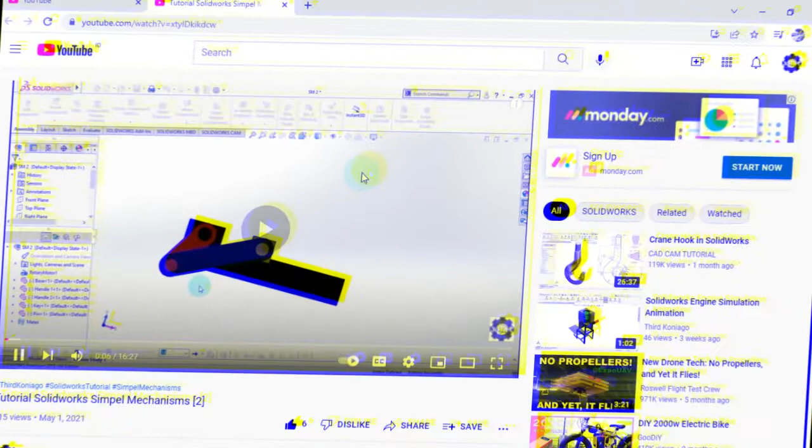Hello everyone, welcome back to my channel, and today I want to show you how to make simple mechanisms like this in Fusion 360. Without wasting time, let's start it.

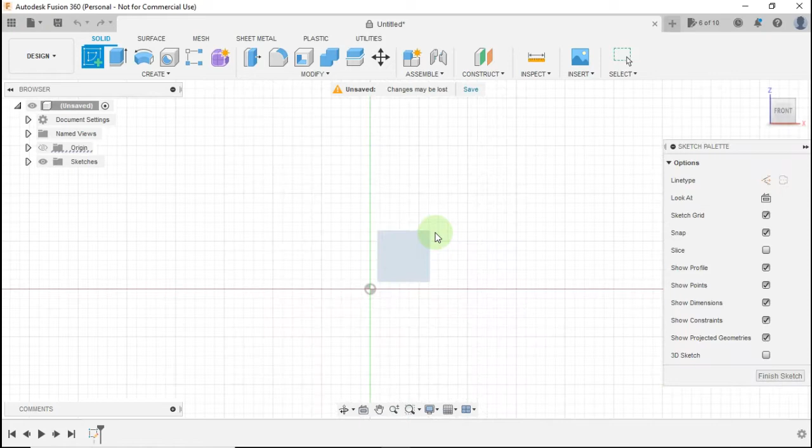First step, we make a mechanism base. Click sketch, click this plane, activate line, click this point, up the line and make line length 10 mm. Point right the line, make line length 8 mm. Point down the line, make line length 5 mm.

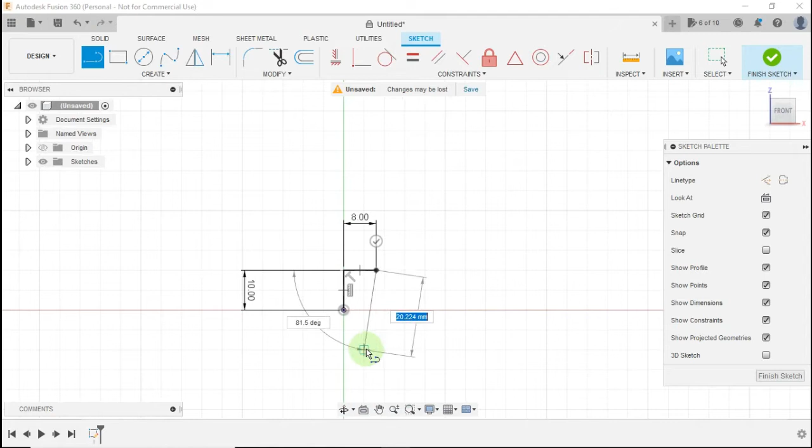Point right the line, point down the line, make line length 5 mm, and click this point. Activate sketch dimension, click this line and this line, make distance 36.5 mm.

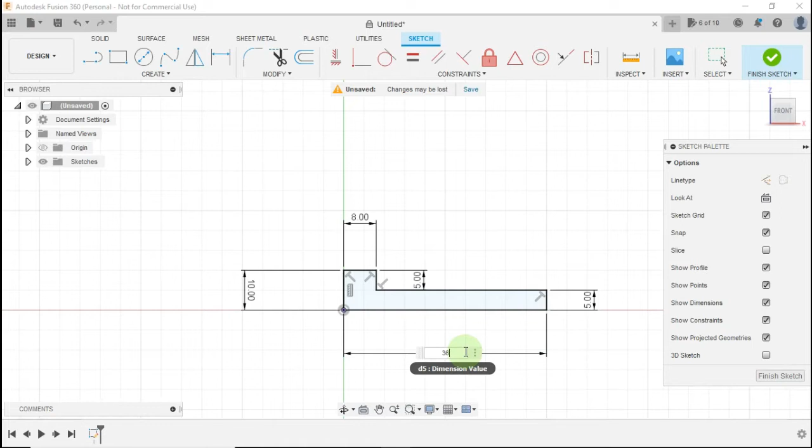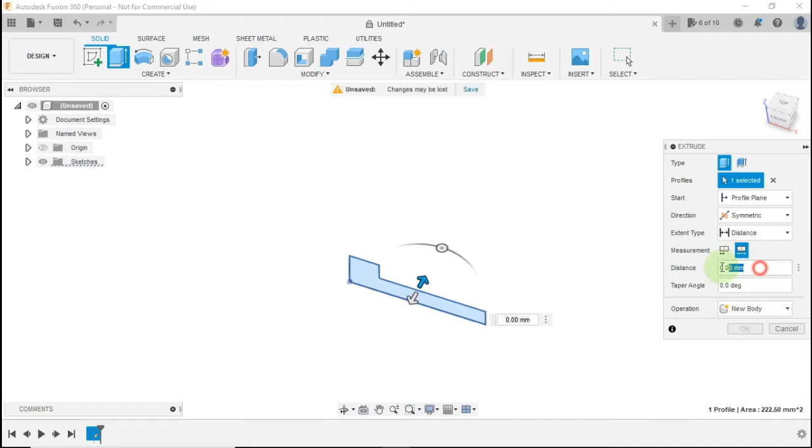Activate extrude, click this sketch, make direction symmetric, click whole length, make distance 5 mm. And make operation new component. Okay.

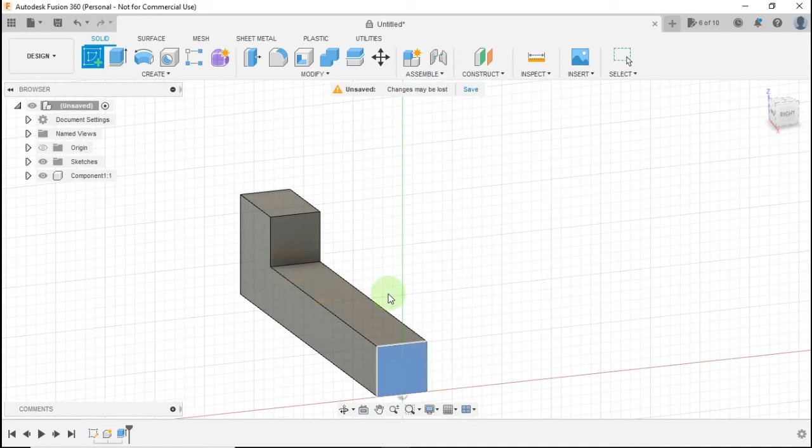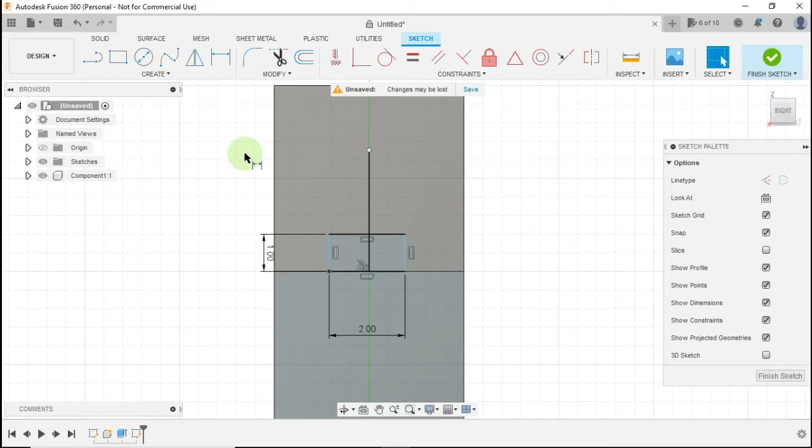Click create sketch, click this face, activate line, click from this point to this point, activate rectangle, click this point, make width 2 mm and height 1 mm. Activate sketch dimension, click this line, make distance 1 mm.

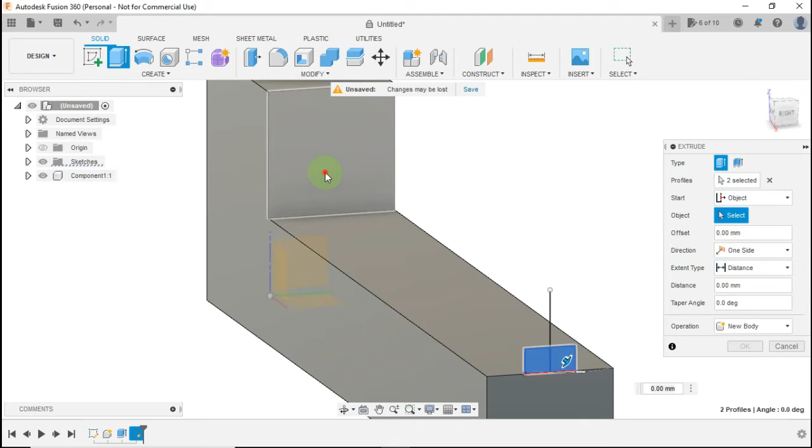Activate extrude, click this sketch, oops, sorry, not this. Make extent type to object, click this face, okay.

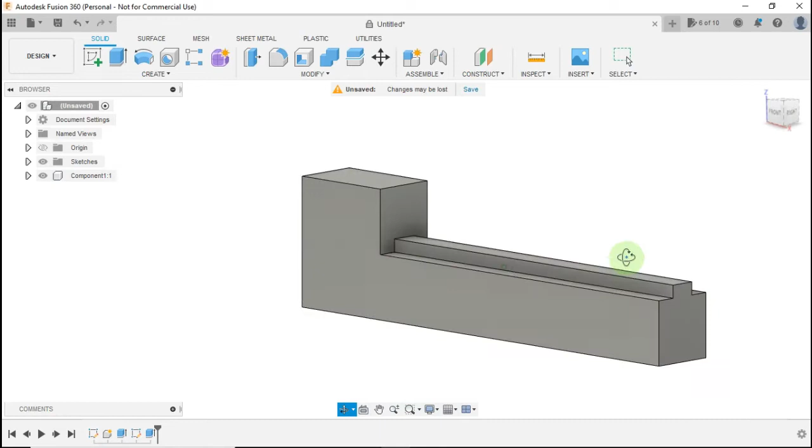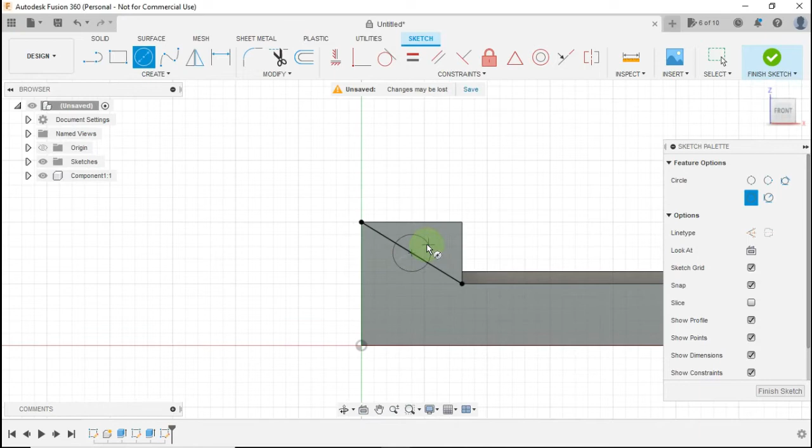Now we make a stem on this side. Click create sketch, click this face and activate line, click this point to this point, activate circle, click this point, make circle diameter 3 mm. Activate extrude, click circle, make distance 3 mm.

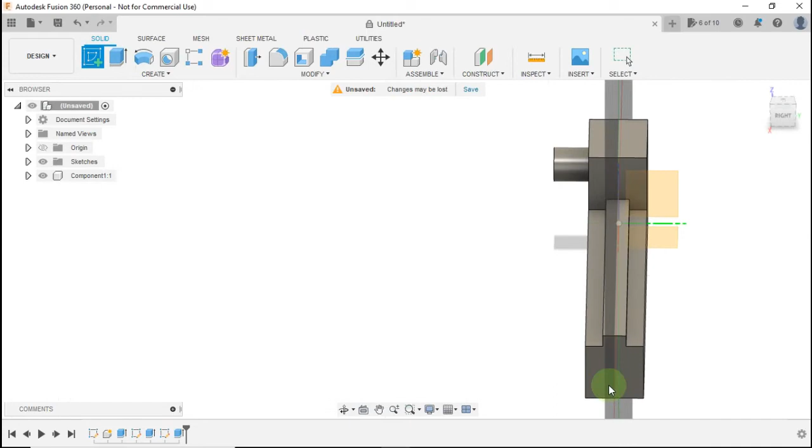Base is ready. Now we make a new component. Click create sketch, click this face, activate line, click this point to this point, just follow the base surface.

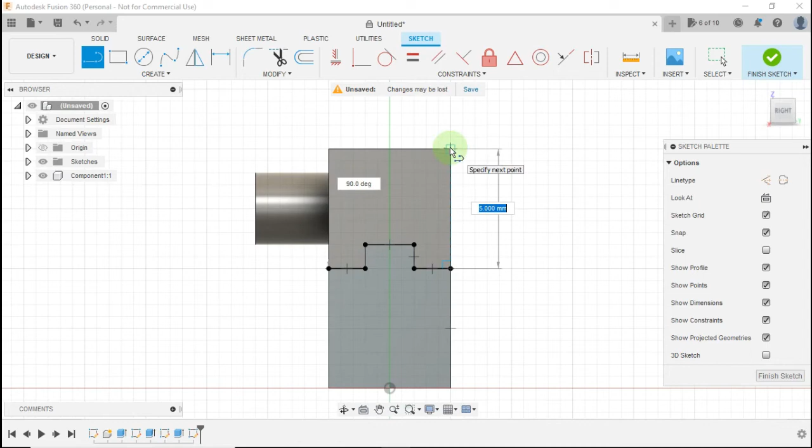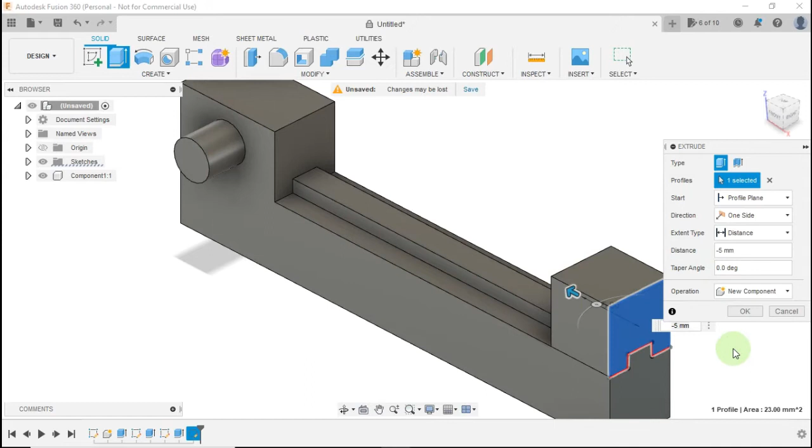Activate extrude, click this sketch, make distance minus 5 mm. And make operation new component. Okay, see, we make a new component. You can drag this component. If you want to return to the initial position, click revert position.

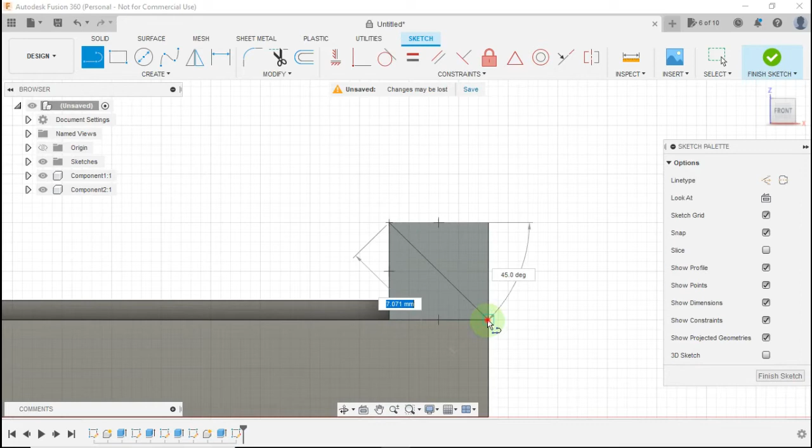Click this face, click create sketch, activate line, click this point to this point, activate circle, click this point, make circle diameter 3 mm. Activate extrude, click this circle, make distance 6 mm. Okay.

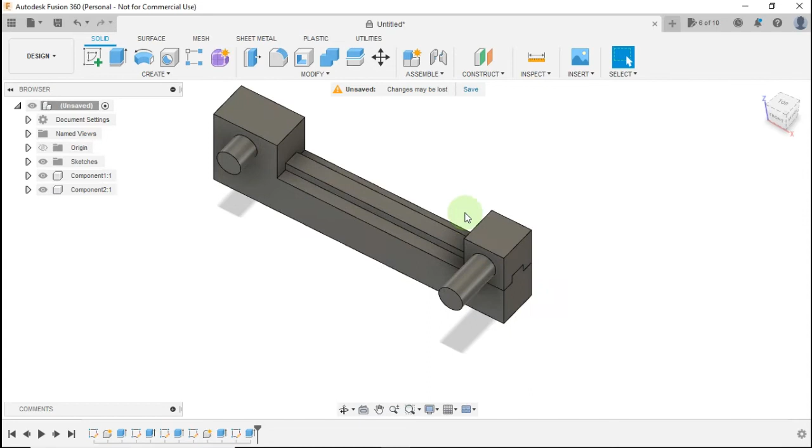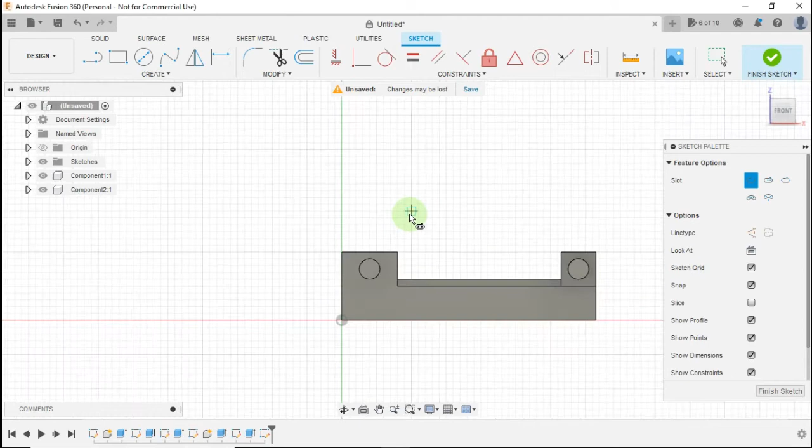Now we make the connecting rod. Click create sketch. Click this plane. Activate slot. Click this point to this point. Activate sketch dimension. Make this line length 10 mm. Make slot radius 2.5 mm.

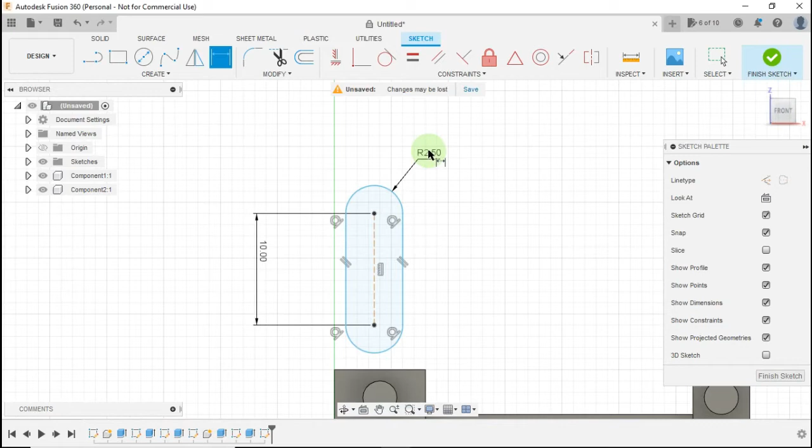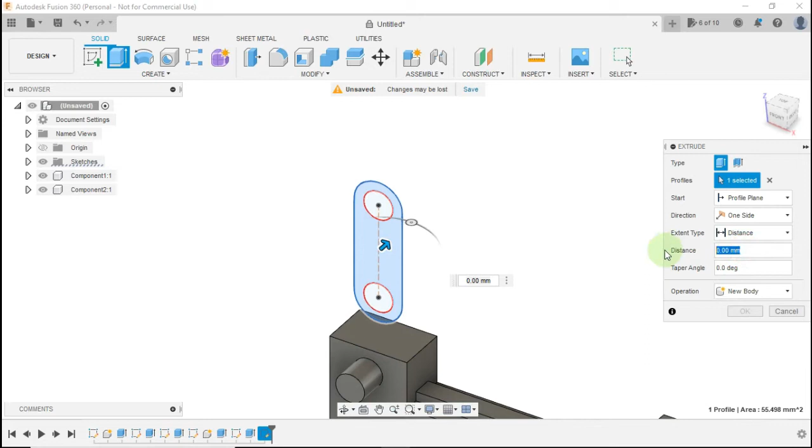Activate circle. Click this point. Make circle diameter 3 mm. And make the same circle on the other side. Activate extrude. Click this sketch. Make distance 3 mm. And make operation new component. Okay.

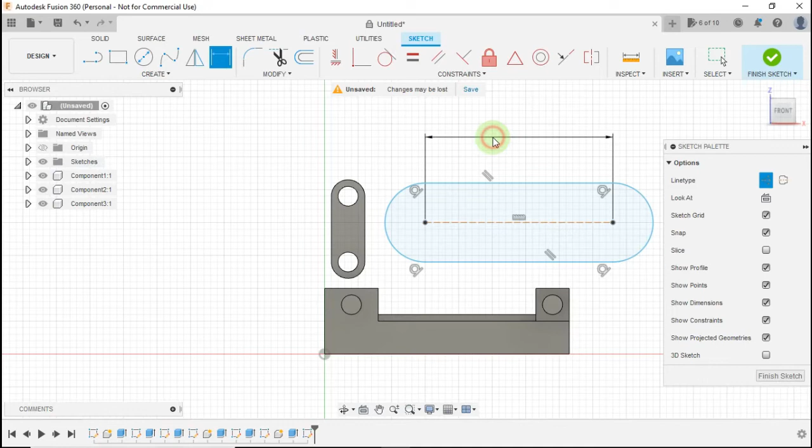Click create sketch. Click this plane. Activate slot again. Click from this point to this point. Activate sketch dimension. Make this line length 20 mm. Make slot radius 2.5 mm. Activate circle. Make circle diameter 3 mm.

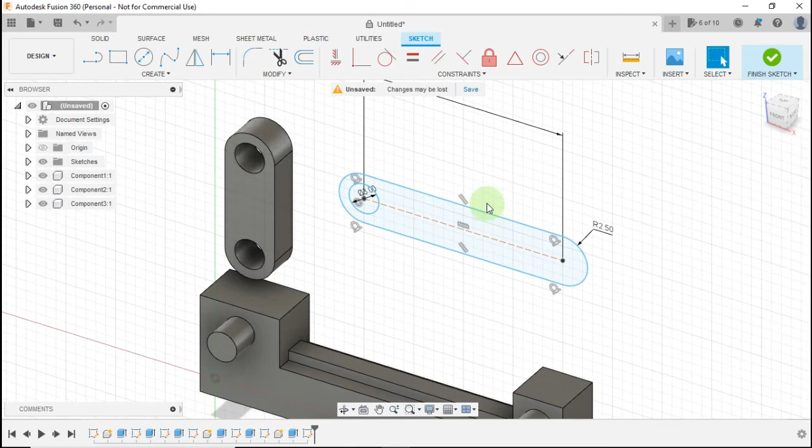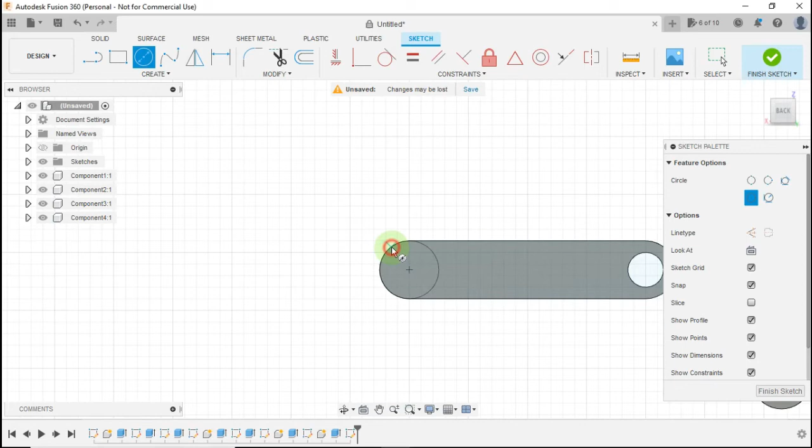Activate extrude. Click this sketch. Make distance 3 mm. And make operation a new component. Okay. Click this face and click create sketch. Activate circle. Click this point to this edge. Activate extrude. Click this sketch. Make distance 3 mm. Operation is join. Okay.

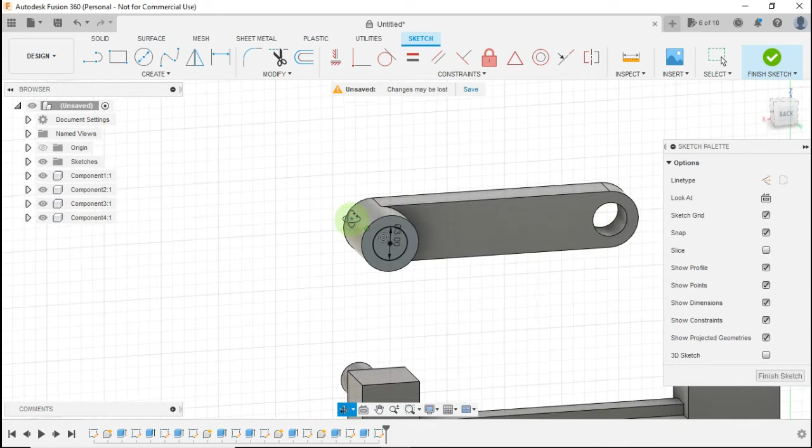Click create sketch. Click this face. Activate circle. Click this point. Make circle diameter 3 mm. Activate extrude. Click this sketch. My operation is cut. And cut this component. See, the hole is made.

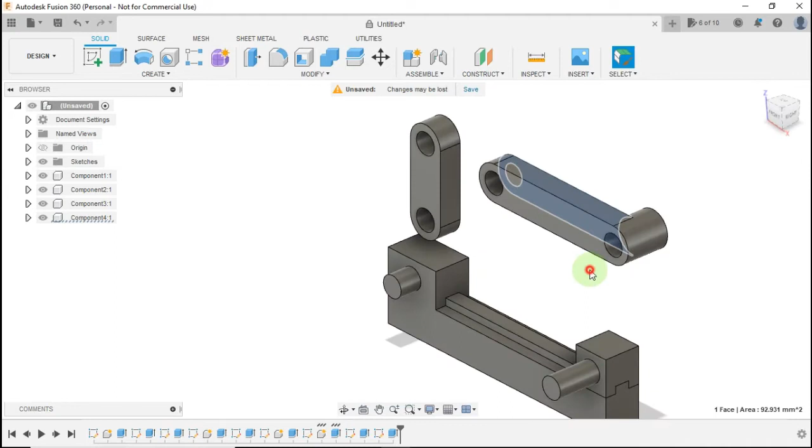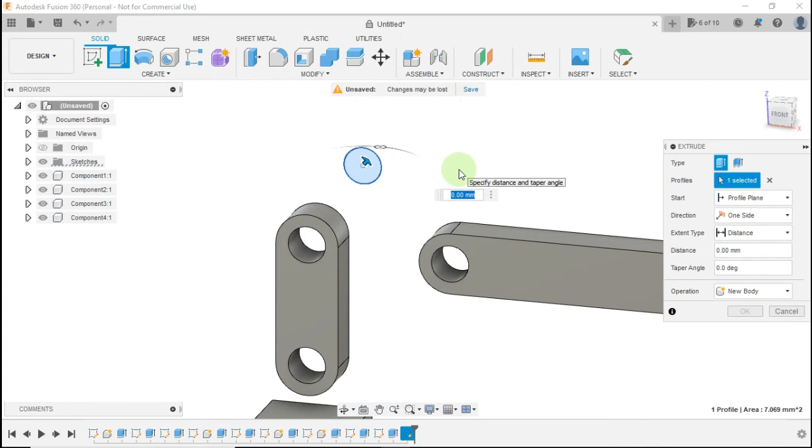Click create sketch. Click this plane. Activate circle. Click this point. My circle diameter is 3 mm. Activate extrude. Click this sketch. Make distance 6 mm. And make operation new component. Okay. See, all components are ready. Now we will assemble the simple mechanism.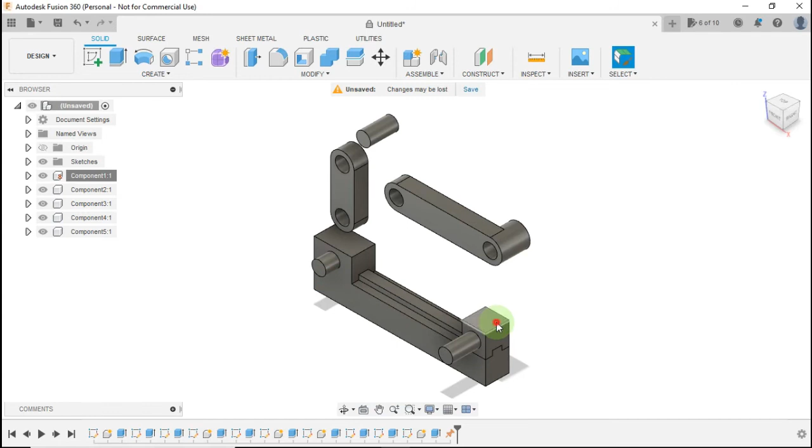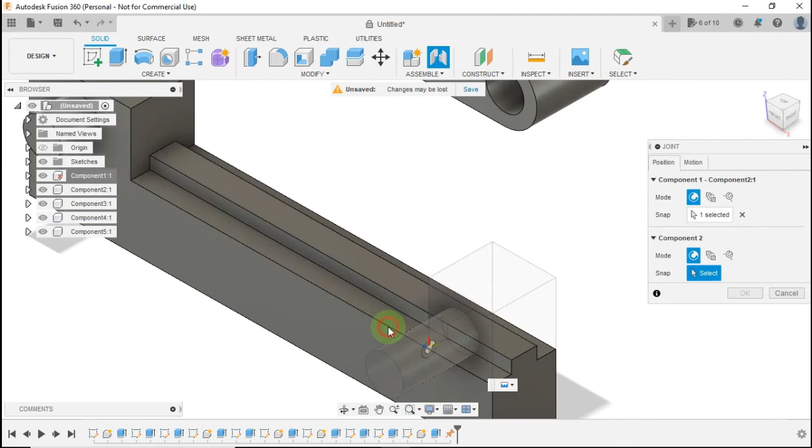First step, make component 1 ground. That makes component 1 unable to move. After that, activate joint. Click this edge. And this edge. Click motion. Choose slider type motion. Okay.

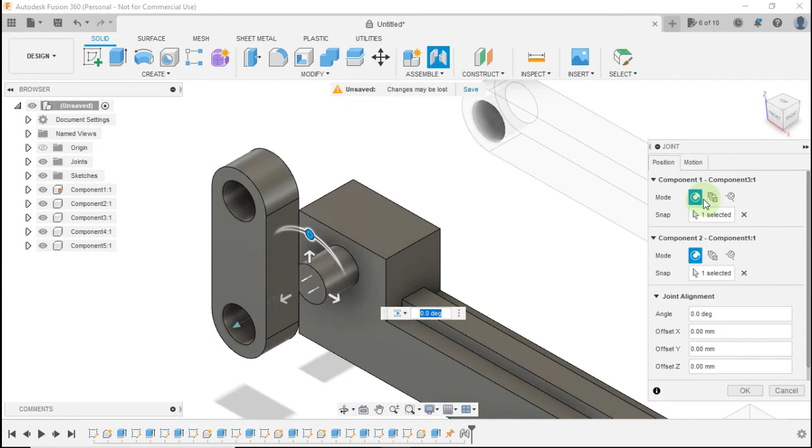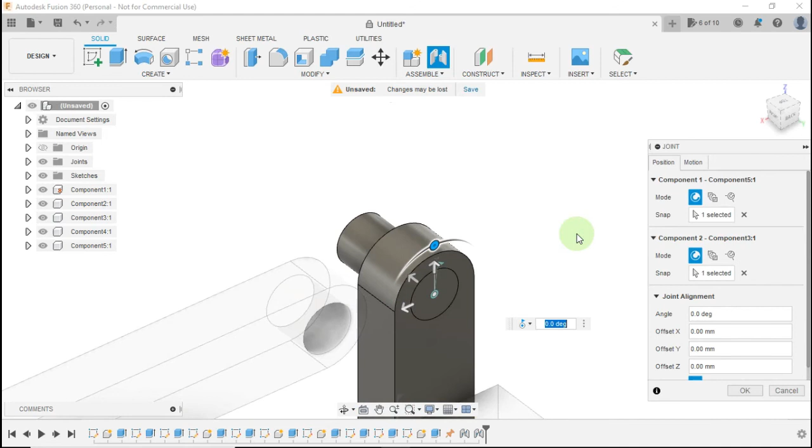Activate joint again. Click this edge and this edge. Click default type motion. Okay. Activate joint. Click this edge and this edge. Choose rigid type motion. OK.

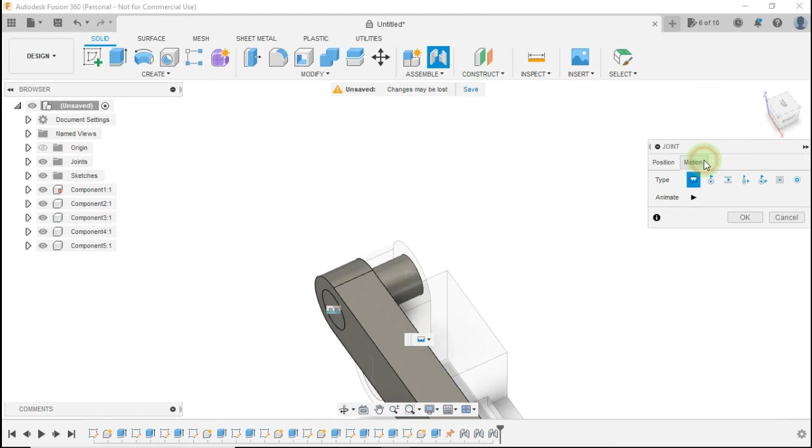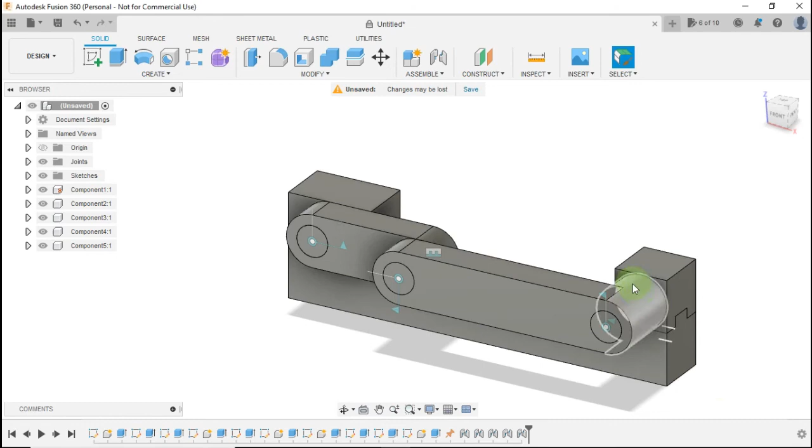Activate joint. Click this edge and this edge. Choose revolute type motion. OK. Activate joint again. Click this edge and this edge. OK. The assembly is done. See, the simple mechanism is ready.

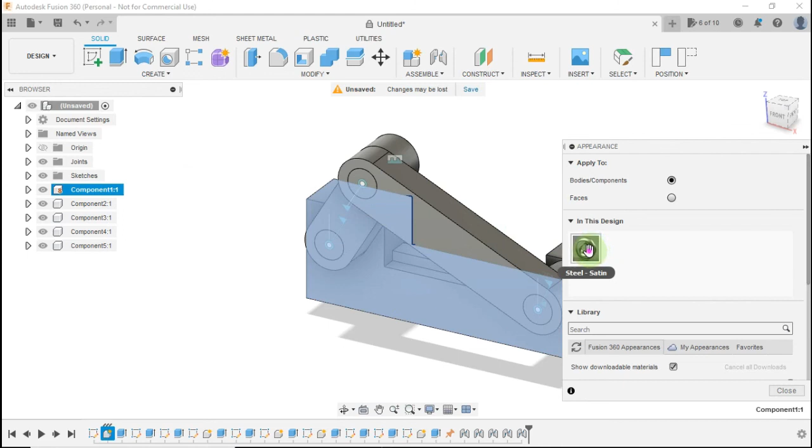I want to change the color of this component. Alright, click component, click appearance. Right click and click edit. Choose this color.

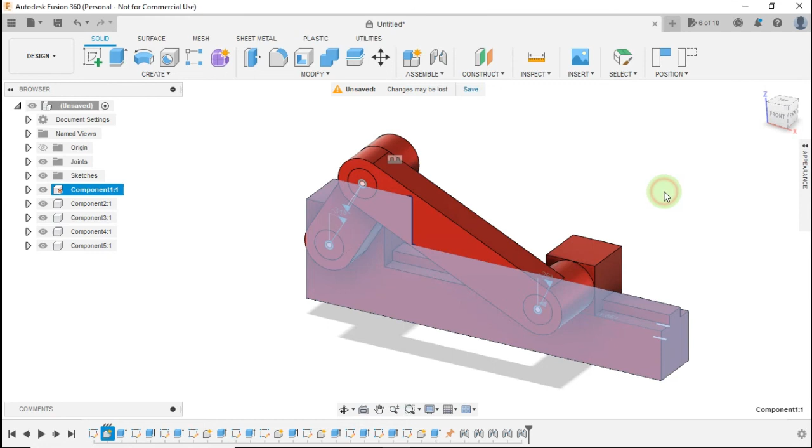You can animate this simple mechanism. Click joint. Right click revolute and click animate model. See, the mechanism moves.